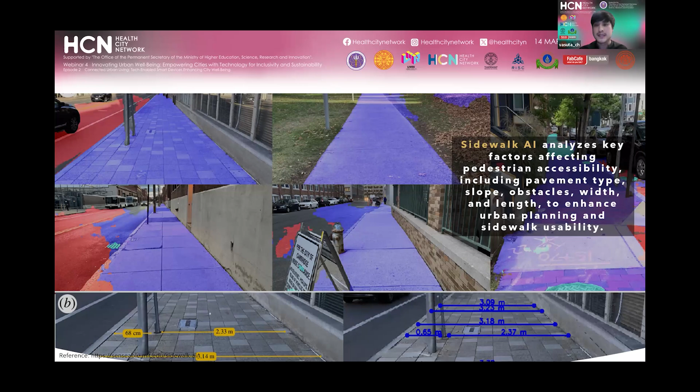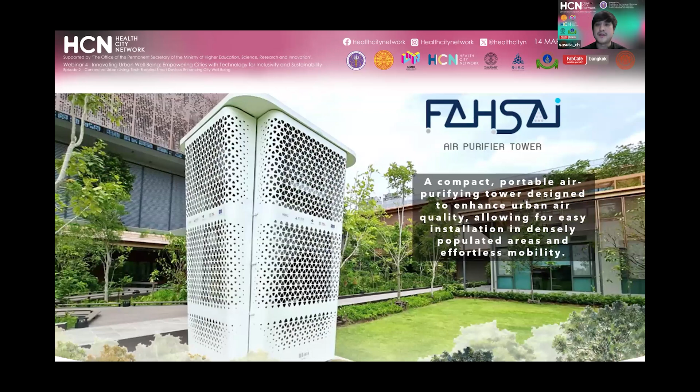The next one is a product that our team developed ourselves. It's called Fahsai, an air purifier tower which can provide air quality data for the outdoors, and also clean up the air within the area. That can help people go out to do outdoor activities during the PM 2.5 season.

As the previous speaker already mentioned, for Thailand right now it seems like every month, every season is turning into PM 2.5 season. I think this product is going to be one of the devices that can help people have a better quality of life. That's all the examples I'm trying to show.

But I'm going to move forward into my topic. My background is architect, so I'm basically focused on the building scale. There's a sentence I heard from a Winston Churchill quote that totally changed the way I work as an architect forever, because it's quite classic and touched my work.

He said, 'We shape our buildings, thereafter they shape us.' So it's not only about design, aesthetic, and function, but I realized that the way we build a building actually impacts our health.

Thinking about the reality, I quite agree with this sentence, because we spend nearly 90% of our time indoors, even if you are an office worker, a student, or a lecturer. If you live in the urban context, it seems like everyone has the same situation, but because we spend our time indoors, it influences our overall health.

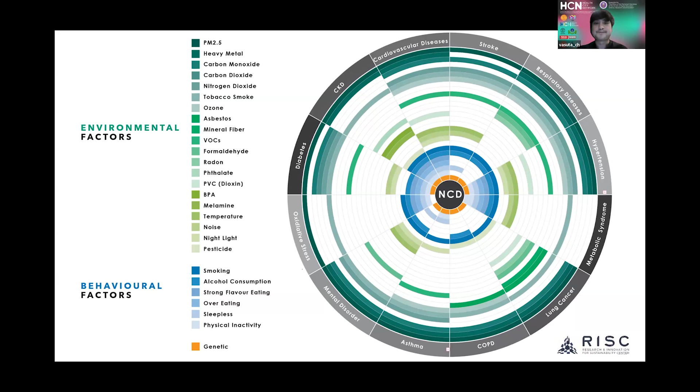The question is, since built environment actually impacts our health, how do we deal with it, how do we make a better, healthier building?

Right now there are several types of building standards that focus on well-being. You can use WELL standard, Fitwel, the Nine Foundations of a Healthy Building developed by Harvard University, or the SOOK standard, which is a Thai version of the building standard for well-being. All these standards can guide the designer, the project, the developer to start thinking about health impact once we develop a building.

I'm going to dive in a bit and talk about WELL-V2, about how it connects with technology. Basically the WELL standard has 10 concepts, but 5 of them can be improved—we can make better performance in these 5 concepts: air, water, light, thermal, and sound.

If we integrate the appropriate technology, it could be very beneficial to the owner, client, tenant, or occupants. Since today we don't have much time to go over all 5 concepts, I'm going to bring some quick examples to demonstrate how technology can link with well-being for people.

Starting with the air concept: believe it or not, each day we eat about 1 kilogram of food and drink about 2 kilograms of water, but we breathe about 20 kilograms of air. You may have heard the sentence 'you are what you eat'—a classic statement, like if you eat something good, your body will last longer. It's the same way with air.

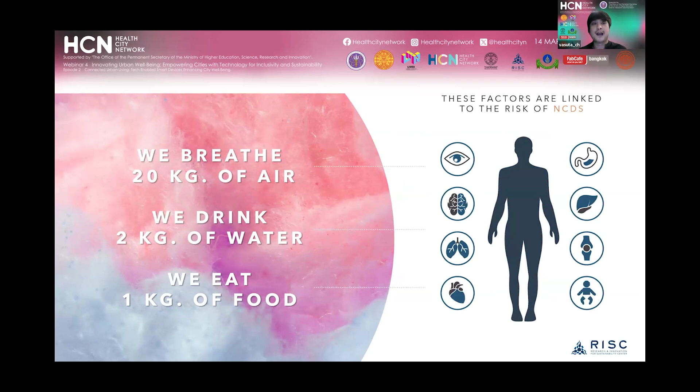Thinking about the source of poor indoor air quality, we have different types of sources. I'd like to touch on the biggest proportion: inadequate ventilation accounts for 52%, contamination from inside the building is about 16%, and contamination from building material is about 4%. These 3 sources are the ones we can control and improve. The other 3 sources, I suppose, are something we cannot control.

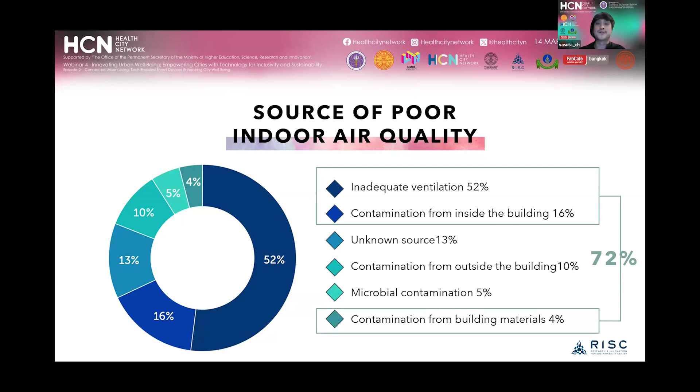But these 3 controllable factors account for 72%, so if we want to improve air quality, this is something we should pay attention to.

I'd like to refer to another phrase from Lord Kelvin: if you cannot measure it, then you cannot improve it. This confirms that if you really want to care about and improve air quality, the best way is to measure it.

I'd like to mention the IAQ sensor, because this is one part of the WELL requirements—that each building, each project, should consider installing an IAQ sensor.

The benefits of the IAQ sensor extend to different stakeholders, but I'd like to start by talking about real-time air quality data.

This is very important and gives direct benefit to occupants or users, because we can know the real-time data, like what is the level of PM2.5 within the building. Right now it's quite easy to get PM2.5 data for the outdoor environment—we can look it up on an application or on the internet. But once we enter a building, it's quite hard to know the PM2.5 level. Some people wear a mask outdoors and remove it once they enter the building, but how can we know the indoor environment is better than outdoor? Because basically the indoor environment can be 5 times worse compared to outdoor.

Once we get the data, if we can sync it with the smart building system, the system can adjust the airflow to work at an appropriate volume matching the demand within the room. We can also detect early signs of building system malfunctions—if something is going to break, we can detect it at an early stage and fix it quickly.

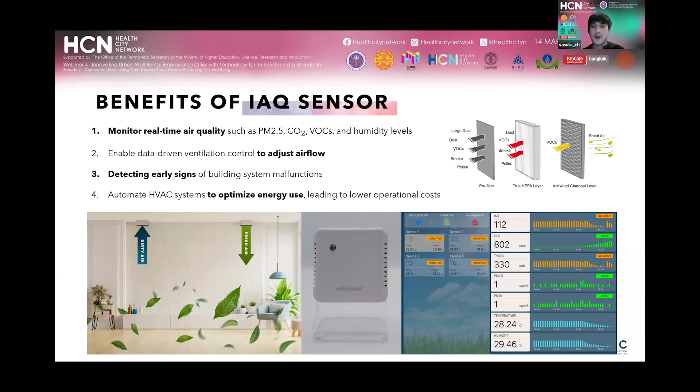At this point, I'd like to show you a quick example and calculation of how an IAQ sensor can contribute to budget saving, in the scenario of a meeting room sized 100 square meters. This is just an easy number for calculation, but I'm not going to go into all the details. I'll show you that if we can understand the demands or airflow of the room, we don't need to run it at full capacity all the time. If we can change the speed and airflow volume, we can save about 3 times the energy consumption of the building. This is just a quick calculation for one room.

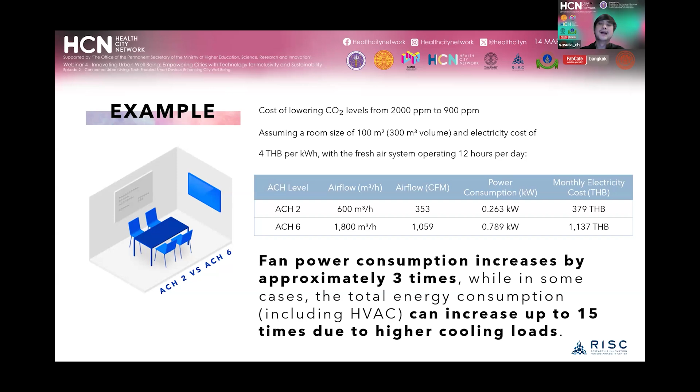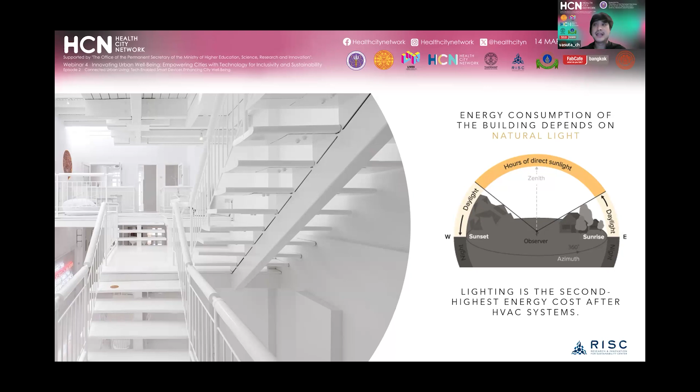The next topic I'd like to talk about is natural light. Believe it or not, the two highest energy costs of a building come from the HVAC system, the air conditioners, because we are a hot and humid country, and the second is the lighting system. Both HVAC and lighting are hugely impacted by sunlight and daylight, and by the way we design the building. If we design a building that receives less heat gain, the HVAC system can work better and consume less energy. And if we utilize daylight access to the building, we don't need to turn on artificial lighting during the daytime, so we can save more energy.

It's not only about energy—I think lighting is also related to the circadian rhythm, our body's biological clock. The way we produce melatonin is related to the daylight we perceive during the day. If we spend time in a building designed with the wrong type of lighting, it can disturb our patterns, so our body can't realize what time it is. For example, if we work overtime at night but still have daylight-level lighting in the building, our body feels like it still needs to be energetic and alert. This affects sleep patterns, which leads to a lot of disease risk later. So lighting is quite important.

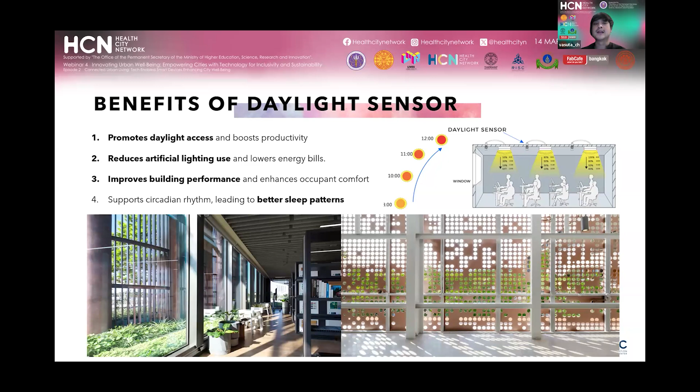Another useful sensor is the daylight sensor, which can help promote daylight access in a project. If you look at the diagram on the right, you can see the light fixtures near the window perform at less output compared to those in the middle or far back, because people get enough light from the window's daylight access. This results in energy savings because we need less energy demand from lighting, improves building performance, and supports circadian rhythm because people get more access to daylight, leading to better sleep patterns. That's the benefit of the daylight sensor.

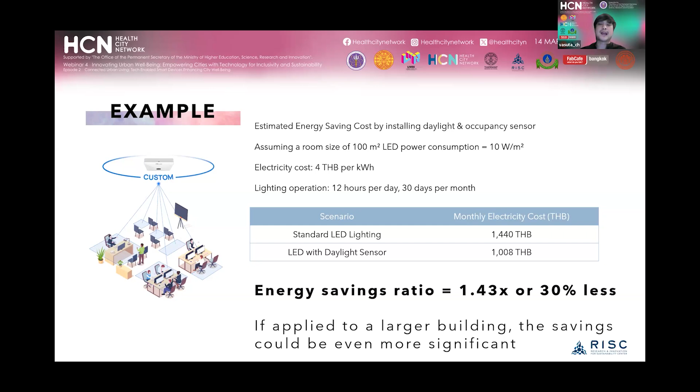I'll show you another example of how the daylight sensor can help the building owner save more on bills. Assume a room size of 100 square meters, installed with LEDs consuming about 10 watts per square meter. Using Thai context data, electricity costs about 4 baht per kilowatt hour, and the room operates about 12 hours a day. Comparing the energy saving ratio between standard LED lighting and LED lighting with a daylight sensor, the daylight sensor can help the owner save about 30% less electricity cost. Again, this is just one calculation for one room, but if you think about the real scale of a building, it can have a huge impact and be a very good benefit for the client.

To close up my presentation today, I'd like to say that the future is in our hands. So let's build it wisely together. Thank you.